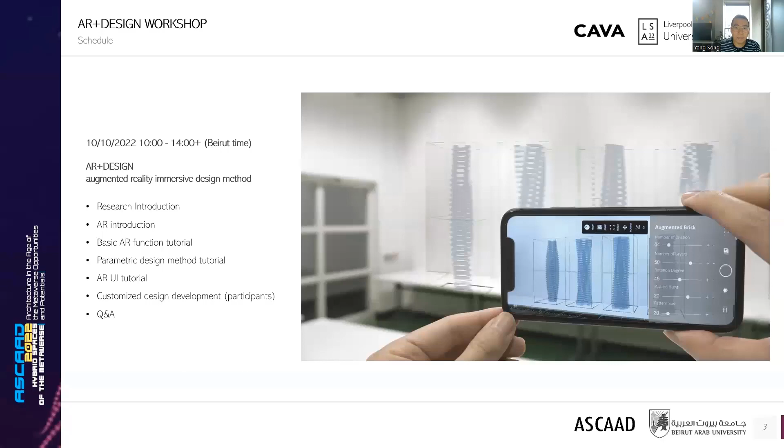After that, the final session was design algorithm development and Q&A. This online workshop aimed to introduce the knowledge of exploring immersive parametric design through an augmented reality environment.

As the quintessential 3D-4D design field, architectural design has been limited throughout its history by 2D to 3D representations. Even though computer-aided architectural design and modeling software is widely used to produce digital 3D models, conventional screen-based visualization methods for design and analysis are still restricted to how well the user understands the space on a computer screen, as the design is done outside of the building site. Hence, there might be disparities between the design and final outcomes.

Ideas like exploring immersive design in AR, as well as real-time modification experiments and interaction with the built environment and the metaverse, will therefore act as the central core of the research streams to reduce issues in the current design method.

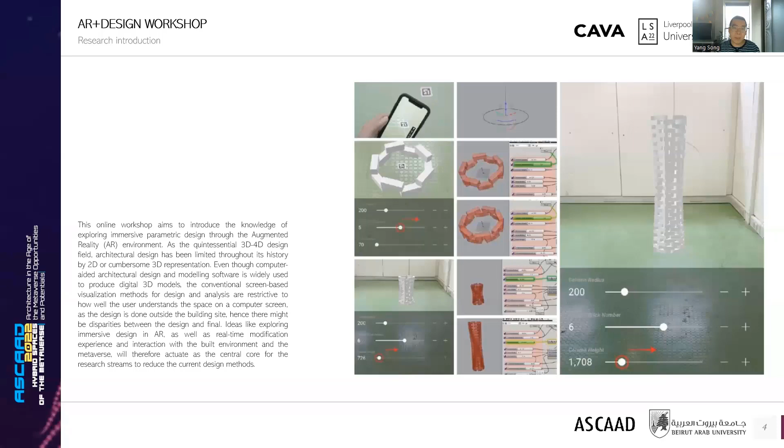So participants learned about the parametric design method of brick-based structures as a demonstration, covering basic AR modeling logic, AR on-site holographic preview, AR real-time interactive functions, and basic AR input methods.

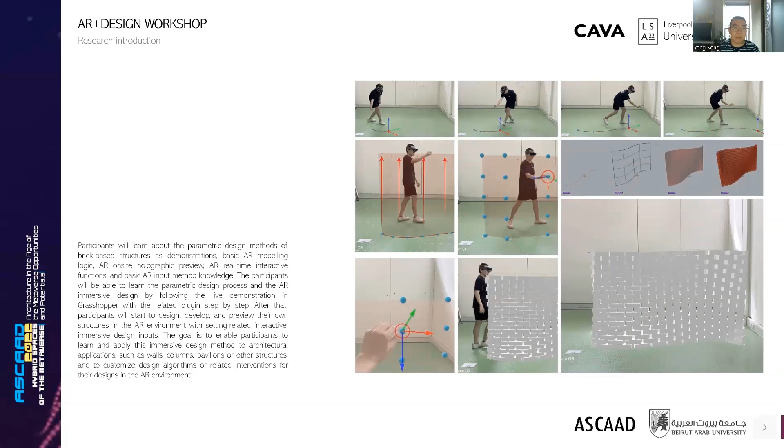Participants were able to learn the parametric design process and AR immersive design by following live demonstrations in Grasshopper, with the related plugin setup step by step. After that, participants started to design, develop, and preview their own structures in an AR environment with related interactive immersive design inputs. The goal is to enable participants to apply this immersive design method to architectural applications such as walls, columns, pavilions, or other structures, and to customize design algorithms or related interventions in the AR environment.

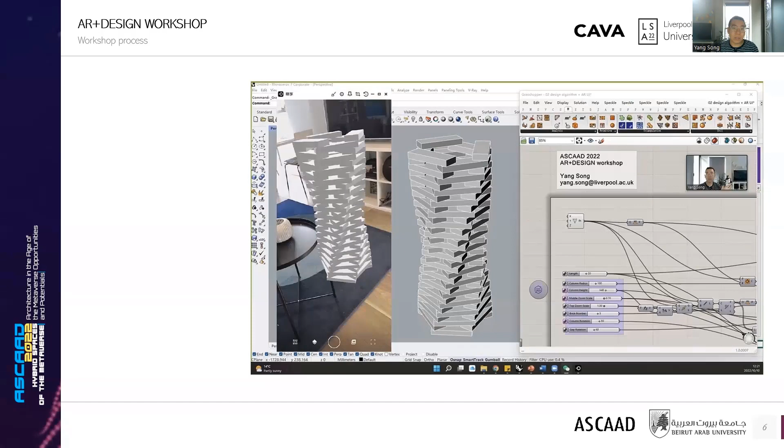There were 44 participants in total, and most of them work in architectural design or interior design. Therefore, the results of the workshop are better because everyone has relevant background knowledge. The workshop outputs were submitted in the form of videos and pictures.

For the video, participants used mobile phones to access the demonstration of the AR immersive design through corresponding skills learned from our workshop, and previewed the design structures in real time, overlaying the physical environment as AR holograms.

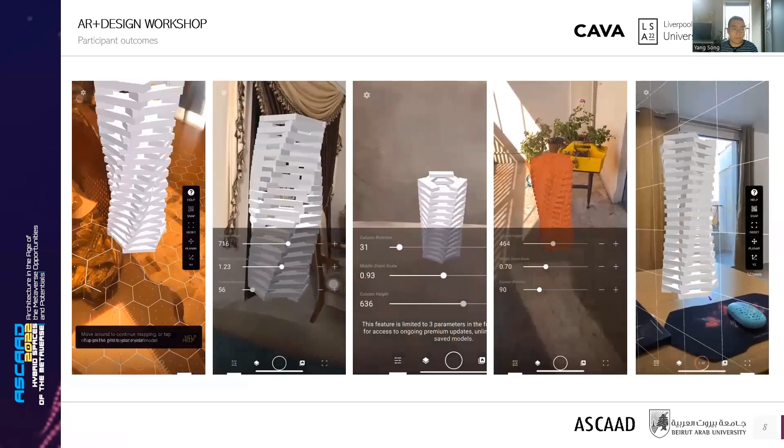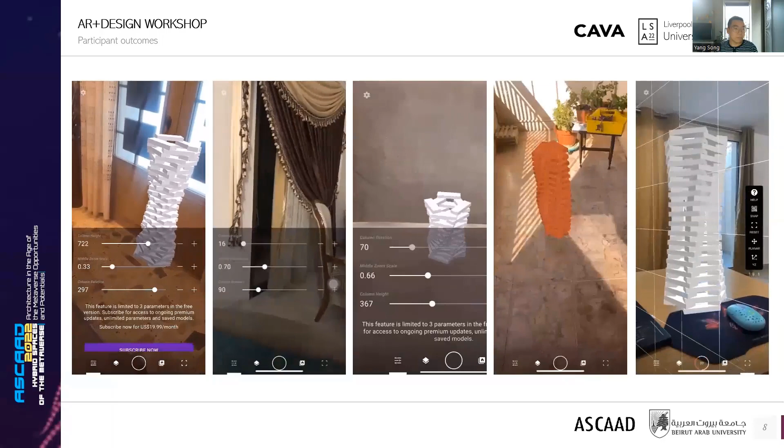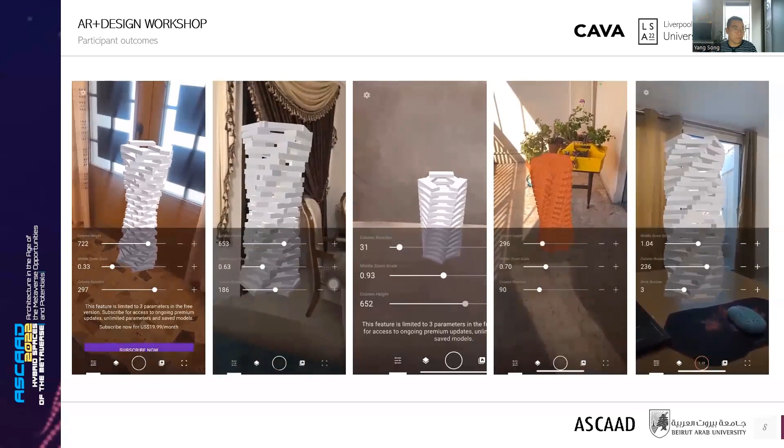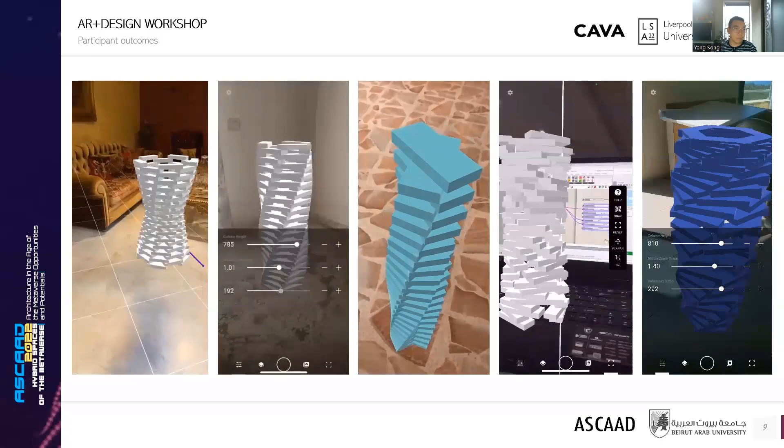Here are some outcomes from our participants. We also have some more fancy structures that were done by our participants.

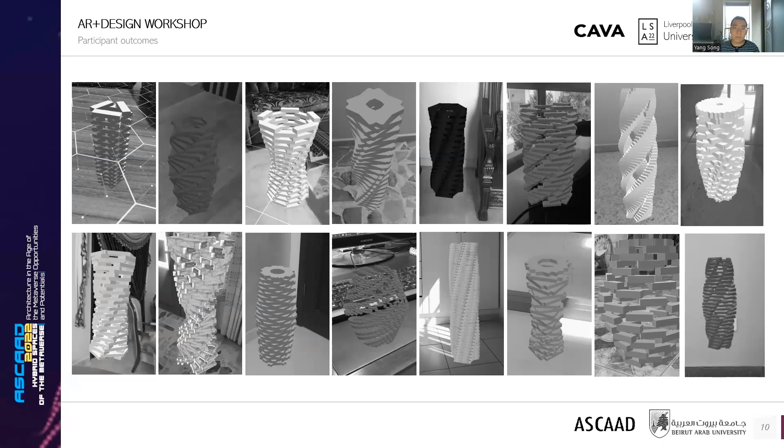Through this workshop, participants learned the basic logic of AR design, as well as the basic interaction functions required for AR immersive design in Grasshopper. These ideas and attempts will help beginners enter the AR immersive design process faster and more effectively for further development. So that's all for my workshop outcome.

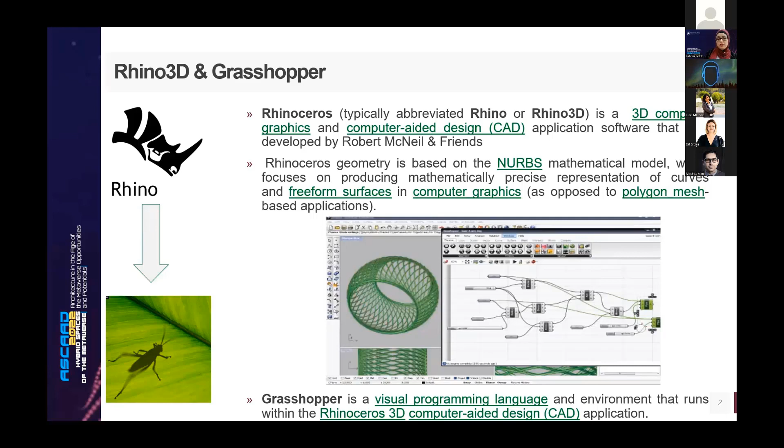The workshop topic was about interactive digital parametric patterns using Rhino and Grasshopper. This was workshop number 2, mainly about Rhino and Grasshopper. Rhino, or Rhinoceros, is a 3D computer graphic, computer-aided design (CAD) application software. Rhinoceros mainly works on a NURBS mathematical model, which focuses on producing mathematically precise representations of curves and freeform surfaces. In Rhinoceros, we have a plugin called Grasshopper, which is a visual programming language and environment that runs within Rhinoceros 3D.

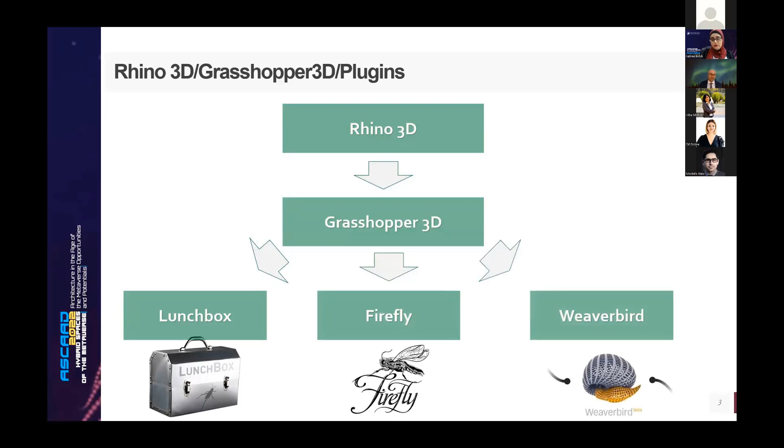In Grasshopper, we have lots of plugins that could be introduced, such as environmental simulation plugins like Ladybug and Honeybee. But in this workshop, the focus was on three main plugins: Lunchbox, Firefly, and Weaverbird. The main one was Firefly.

Here is an introduction to Lunchbox. The Lunchbox plugin works on putting panels with different examples on surfaces, such as diamond panels, hexagon panels, random, skewed quads, triangulation, and other types of panels. It also works on trusses, creating structures, grid structures, hexagonal structures, and other types of structure. Weaverbird works just on meshes, such as Catmull-Clark smoothing and splitting meshes into quads.

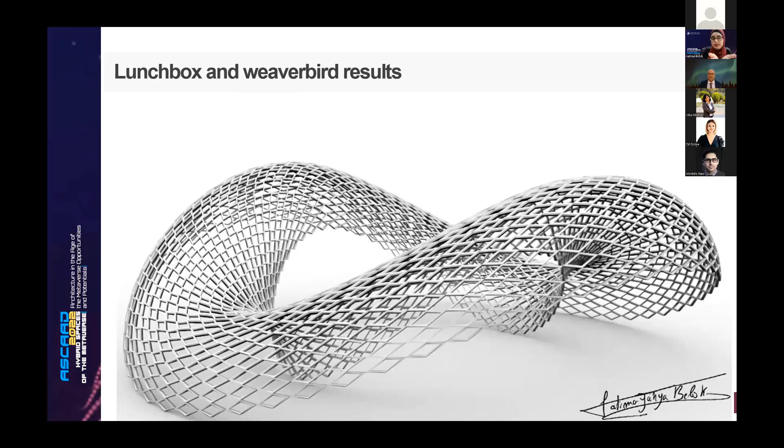The main plugin was Firefly, which is focused on introducing sound. These are some examples of Lunchbox and Weaverbird results, just based on surfaces that give patterns. So these are some examples. The main plugin was Firefly.

Firefly focuses on giving input. This input could be a sound, music, or a voice. Then the process works to give an output. What could be this output? This output could be an interactive parametric pattern. So I introduce a sound that has different frequencies, and this different frequency will give different parametric patterns.

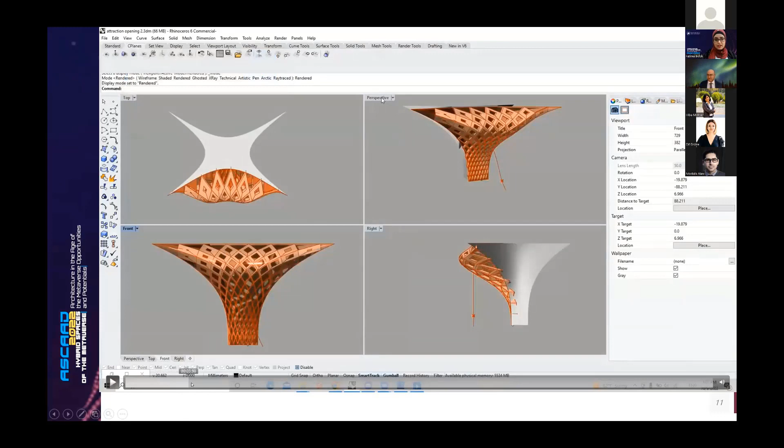For example, here with this interactive facade, we can see the difference between the patterns. Each differentiation in the pattern is based on the sound - if the frequency is high or low, it differentiates the pattern. So based on the music or the sound, we could have different patterns. So this was one example.

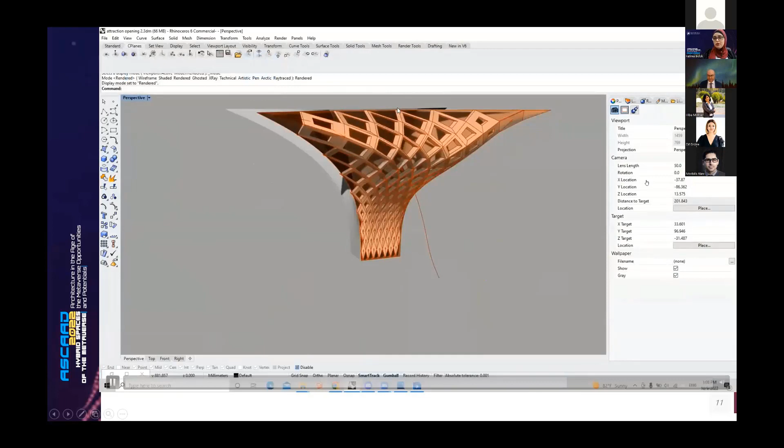The focus of this presentation is mainly on the work of the students. Let's see the examples of the student work. Each student presented an A3 paper with all the designs and work done during the workshop. We started by putting a small sphere.

We introduced, for example, the sound of the student or any music they wanted, and we turned the frequency high and low, so the spheres started to move based on the z-axis, up and down. Then we added more spheres - for example, here we have 5 spheres that move up and down based on the sound itself.

After that, we moved to more complicated examples in Grasshopper. We worked on creating surfaces in Rhino, then transporting these surfaces into Grasshopper using Lunchbox and Weaverbird to create a pattern on the facade. Each surface had 3 different patterns because students baked 3 different levels of thickness based on sound - low sound, higher frequency, and higher still. So the thickness was valued by the frequency of the voice, becoming more or less thick based on the sound.

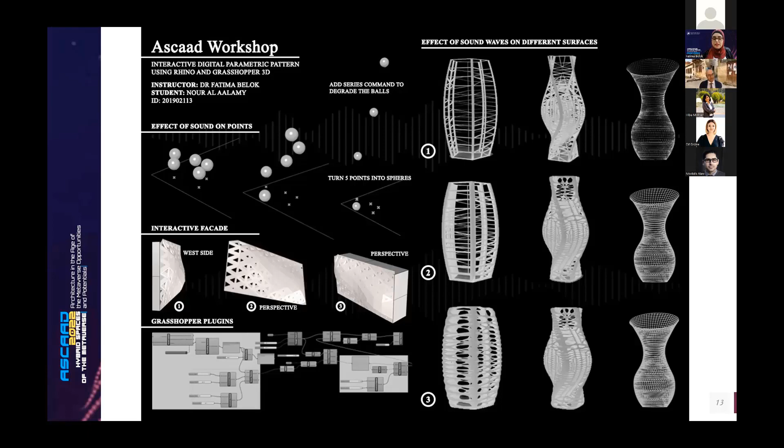We also tried different types of surfaces, for example on different towers based on rotation. We tried different components such as rotation, using series, and different types of components and patterns - here is the Grasshopper plugin. They started with a very simple Grasshopper connection, then it got more complicated to understand the idea further.

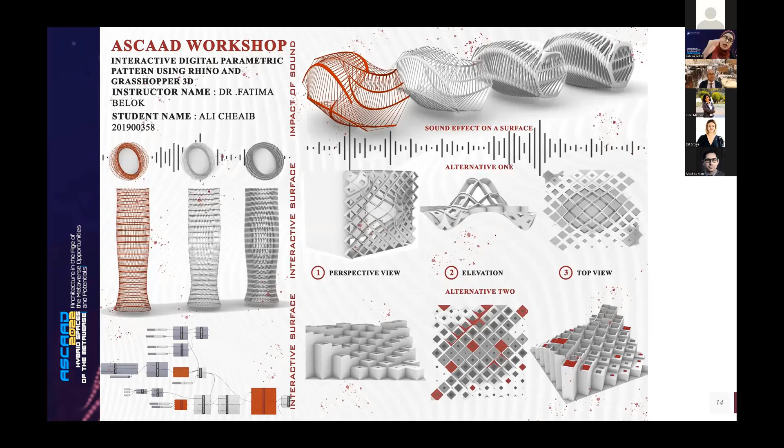Here they also worked on attraction, but based on the z-axis. We can see, if these are buildings for example, these buildings become higher toward the end. We can see a different example here from Neamat, also working on attraction.

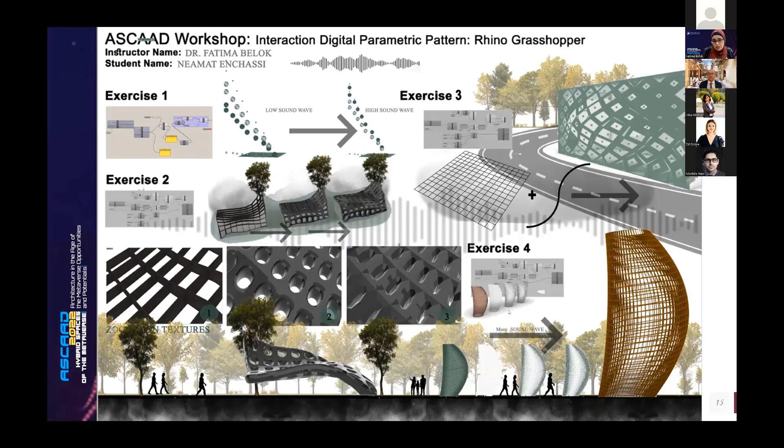She created a shading using Catmull-Clark in Weaverbird that works on meshes. She transformed the surface into a mesh - they had the knowledge of how to transform the surface to a mesh, then apply Catmull-Clark to get a smooth pattern, and how to change its width.

Another student's main focus in Firefly was on something called sound capture. We have the main component called sound capture that captures the sound, then a timer where we specify the time, for example 20 milliseconds or 10 seconds to capture the sound. Then we have remap and construct domain, based on the frequency, whether it's very big or very small.

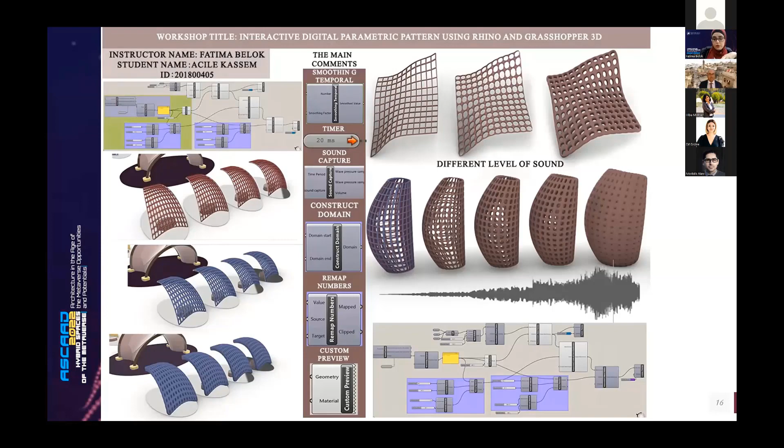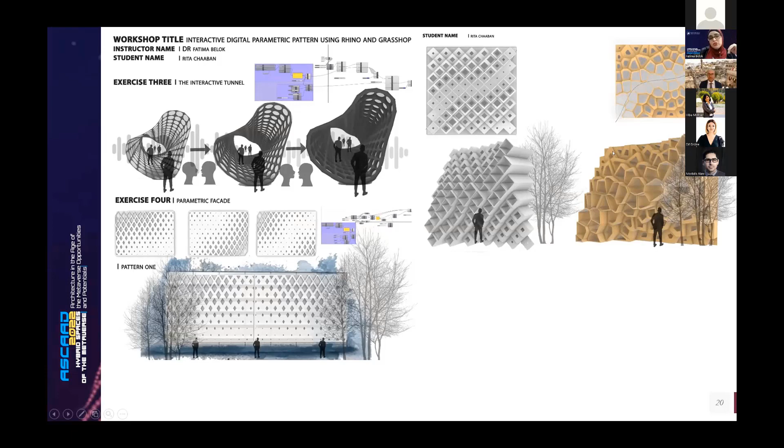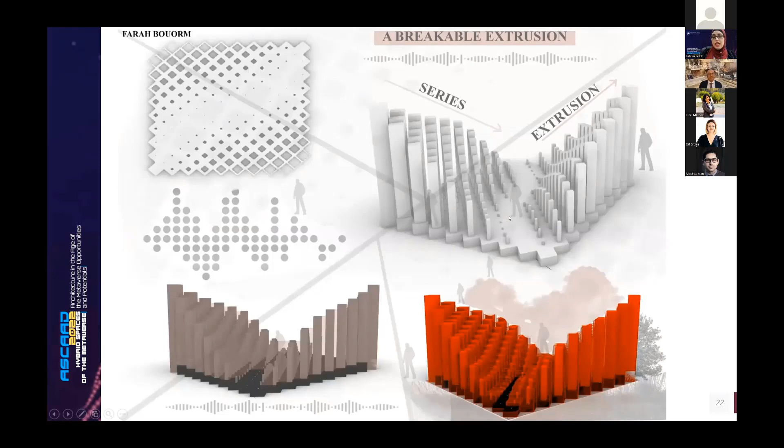Here is another example - he designed a building, and as we can see each student has their own design. We focused on each student putting their identity into their design. For example, this student used the Voronoi pattern and attraction at the same time, introducing sound. Here is another example based on attraction, but using series and extrusion, along with sound interaction.

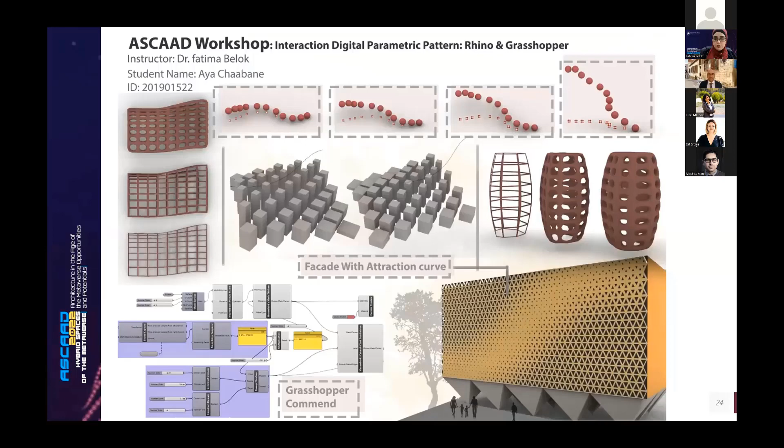Also here, the work was on Lunchbox using triangulation. In all the posters, we can see they used 3 different items: Lunchbox, Weaverbird, and Firefly for the sound. These are different examples.

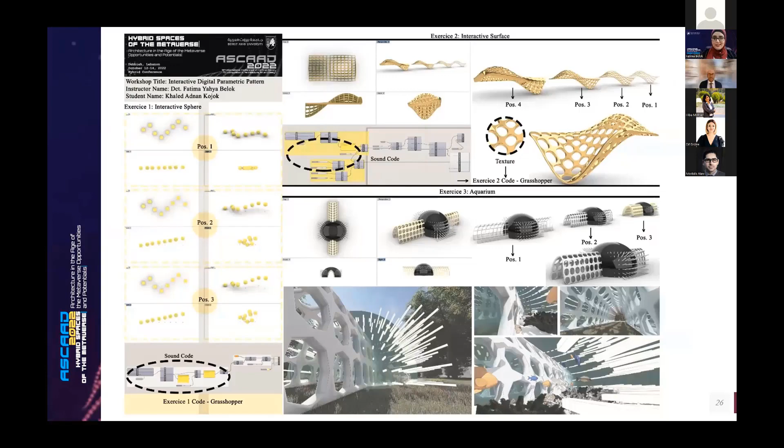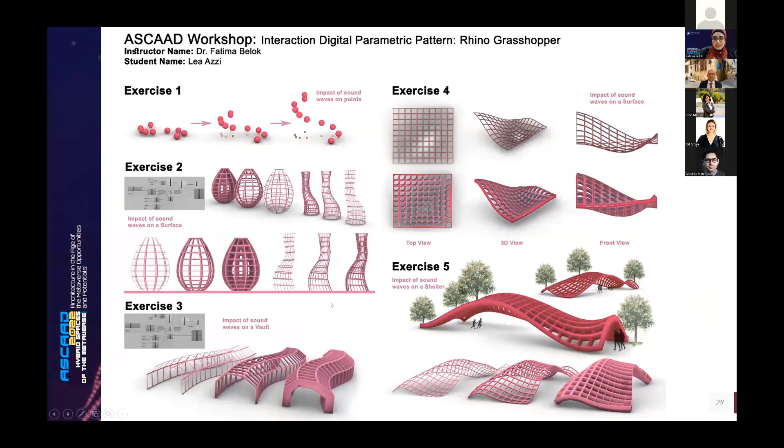Some students started creating their own projects. For example, here a student created an aquarium with concepts and ideas using a dome. This was a design for a surface, and this was a design for a dancing tower and a passage. Now we'll see a small video of the movement of the facade and pattern.

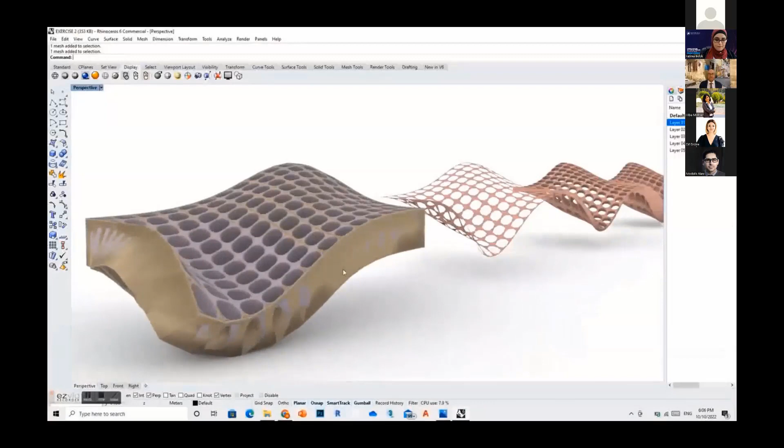I'll show you the video now, it's just 1 minute. This is the attraction based on the sound.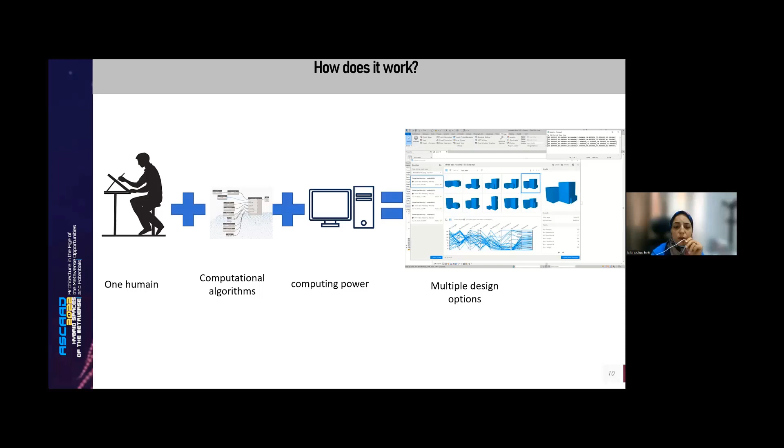Generative design is actually combining human, computational algorithms, and the cloud computing power. Combining these three, we can generate thousands of design options. So you have to understand what you want to achieve, define your problems. This requires you to know how to use Dynamo and create Dynamo scripts. Also, you need to decide ways to measure success and think about how to review the results. So using algorithms, you can decide what problem to solve, what goals must be achieved, and what factors are most important to solve these problems.

So how does it work? Well, we generate multiple studies to find the best outcomes. There are three or four ways we can do this using a generative design tool in Revit. The first one is randomizing, so we can keep running the study in multiple sessions over and over again, and we can filter through the outputs at the end to find the best result. You can also do what's called a cross product, where we generate every single possible outcome so that we can fully analyze the results.

We don't tend to use the cross product because it's pretty slow and it generates a lot of results. But if you really need to get the absolute best, this is the way to do it. We can also use a method called optimize, which generates multiple tests, and we only see the most successful tests out of each batch. This way, you don't see the really bad results, but only the ones that are almost the best, and then you find the best of the best among them.

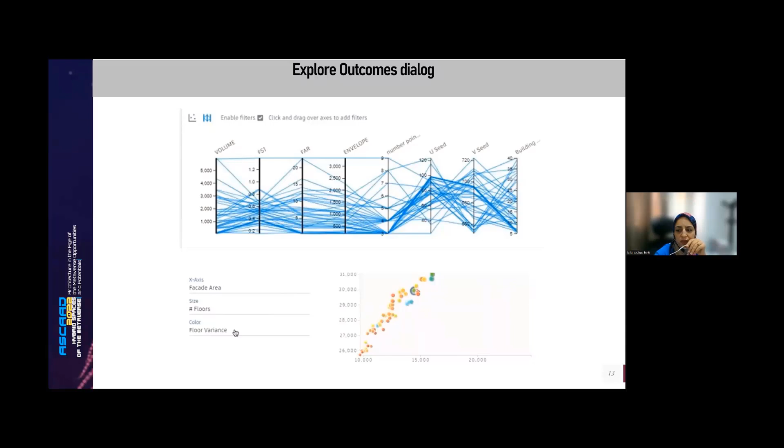You can also explore like this. I prefer using this show/hide parallel coordinate to explore outcomes, dialogue, and constraints display as a follow-up, in the list view of inputs and outcomes, so you can clearly identify which value changes for each outcome and which value stays the same.

For the first day, we focused on Dynamo basics, so as to create a model for a generative design study. We began by developing a common understanding of the mechanics of Dynamo, then moved on to build a set of graphs together that include some basic geometric applications and Revit integration.

For the first application, the objective was to introduce parametric modeling via Dynamo, and the exercise consisted in setting two volumes by declaring variables or inputs, and outputs evaluators, which represent the objective of generative design.

Revit, Dynamo, and generative design were used to study the volumetry of buildings through an iterative process that generates outputs to satisfy certain constraints. The first step is to define inputs and variables depending on the ultimate goals. Then the last step is to select the optimal solution.

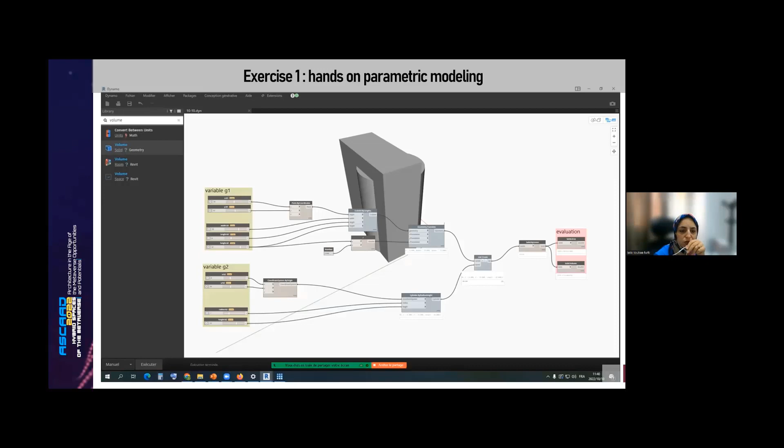On the second day, we focused on adding evaluators and generating design options, and we went over the fundamentals of optimization and how to frame a design problem in terms of goals and constraints in order to drive multi-objective optimization and evaluation in generative design.

We explored the various ways our problem definition can affect the result of the optimization. We exported the optimized solution to Revit for a BIM study.

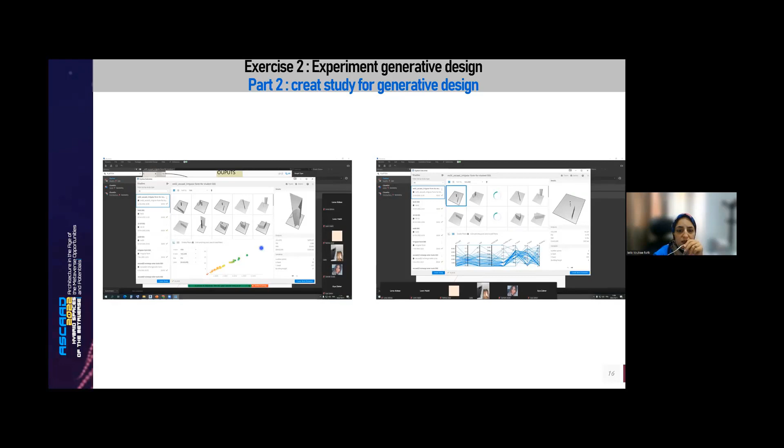The second exercise was a slightly more advanced application. The first part consisted of parametric modeling. We gave participants a program code to complete with Dynamo by adding evaluators. The second part consisted of testing various methods of creating a study with generative design and visualizing results. The third part was to export the result into Revit to generate a solar study and explore a BIM study.

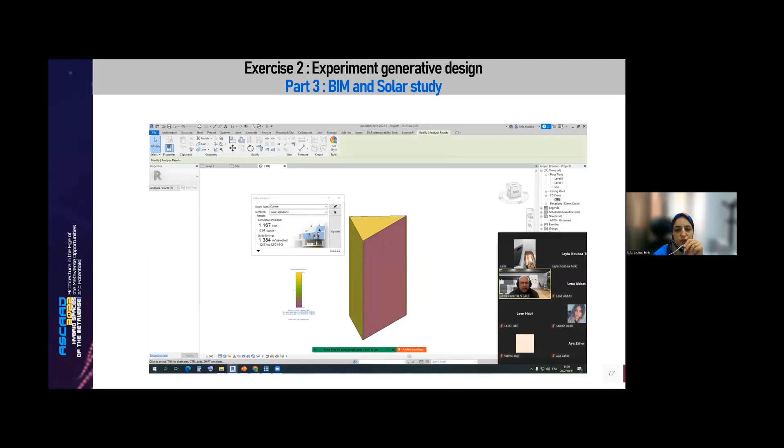Once the optimal solution had been determined, it was possible to import these results back into the Revit environment to complete the BIM modeling study. During this workshop, participants learned how to build geometry generators and evaluators using Dynamo, how to use these generators and evaluators to drive multi-objective optimization toward specific goals in generative design, and how to use generative design tools to evaluate the generated optimal solution and integrate some of these designs back into Revit for a BIM study.

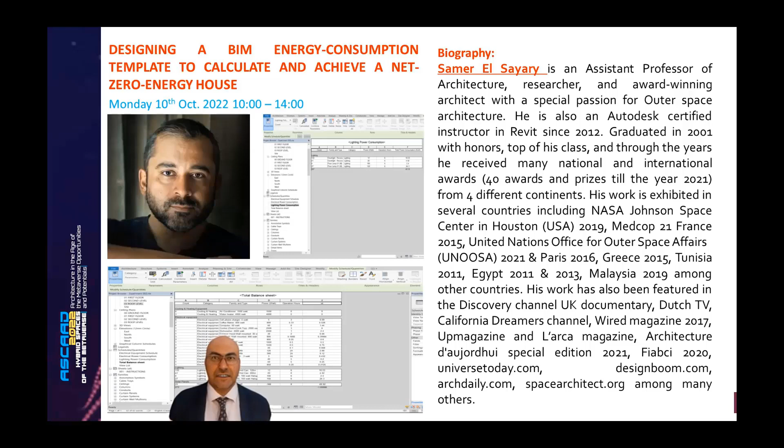Thank you, Dr. Karim, for the introduction. Let me just share my screen. Okay.

So the workshop that we concluded last Monday was on zero energy houses. It is a pressing issue in today's contemporary problems—the issue of energy. We combined zero energy knowledge with how to design a passive house using Revit and BIM technologies.

So I would like to introduce my manifesto first: digging deep into the rules of the universe, including our heritage and our legacy, and applying those rules using cutting-edge technologies—in our case, with BIM, Revit, and some simulation software.

Number 3 is delivering this system of knowledge to future generations, as we have done already in this workshop. These are a set of projects, a line of research that I have pursued since 2011, combined with cutting-edge BIM technologies. So the line of research, the line of practice, and awarded projects are all fused into one fusion pot, which was introduced to the students last Monday.

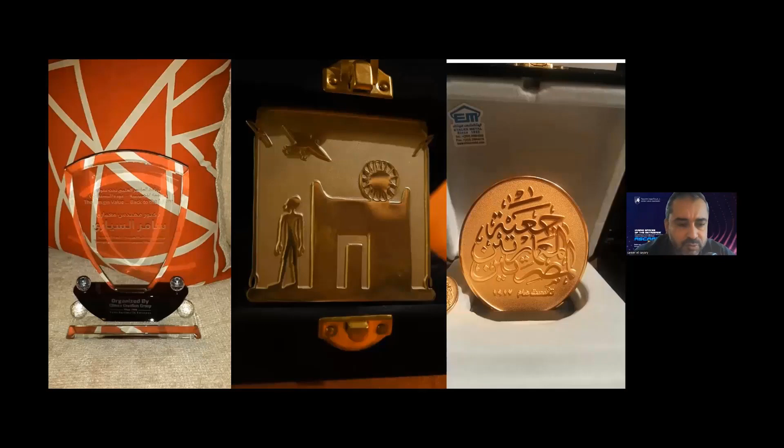This project was introduced to the students and was awarded internationally in several venues. One of them was an introduction to passive houses, and how we can understand the basic fundamental principles of designing a self-sufficient house in terms of energy, food, and water production - a complete sustainable approach.

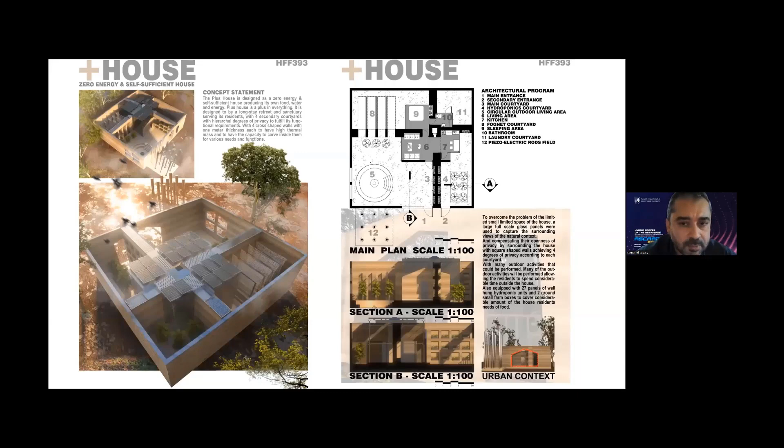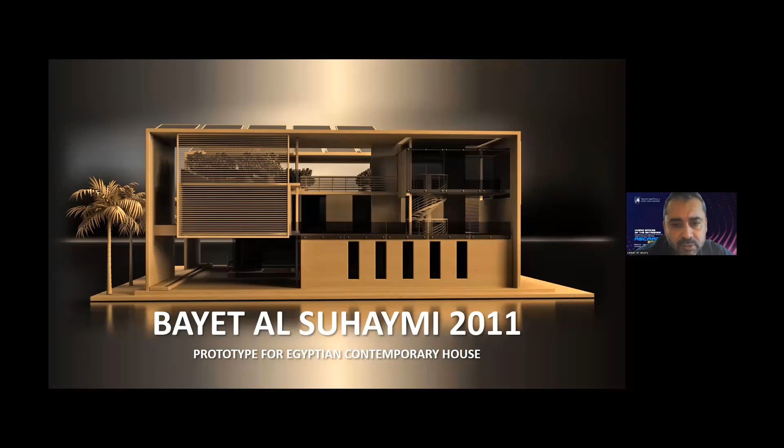The first presentation was for the Plus House, and the second, which was the main one, was Bayet Al Suhaymi, an awarded project. The plans and the Revit file of this particular project were delivered and passed to the students to start experimenting and designing, taking it as a role model so they can take the lead in their own design projects.

Sorry. It's a little bit. Okay.

So the first slide is a simulation of the passive approach of designing a building without the need for any AC or heating system, using and downloading the EPW files, which contain all of the climatic data of Alexandria City from the US Department of Energy website.

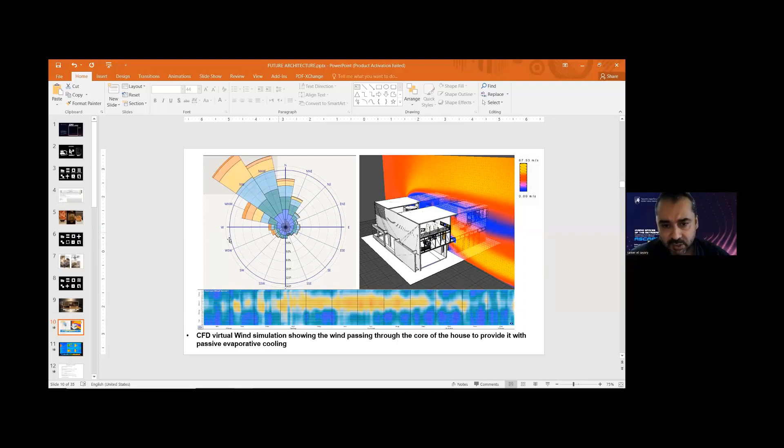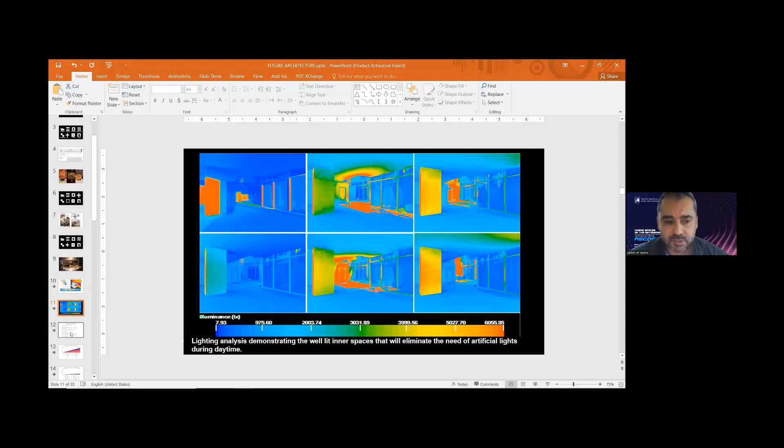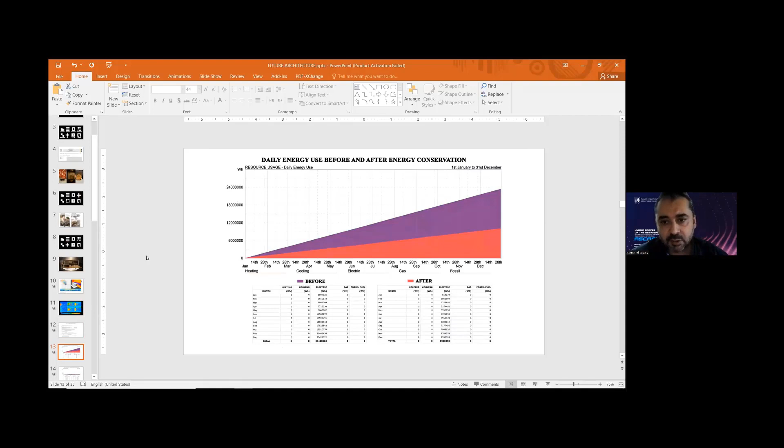After running some simulations, including daylight simulations, we concluded that the design could use daylight for at least 8 hours per day without any need for electrical or lighting equipment. Then a basic calculation method was used to compensate for all energy consumption using solar panels, reaching the level of decreasing the carbon footprint of a building.

Another example was applied in Arizona, which proves that zero energy houses could be applied anywhere depending on the environmental parameters and the specificity of the site.

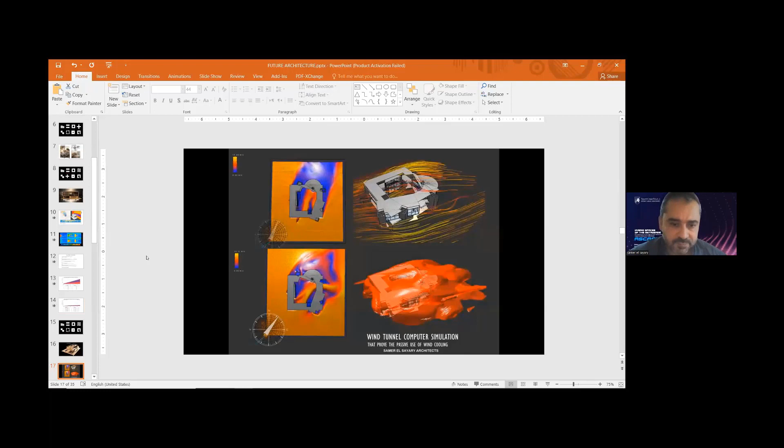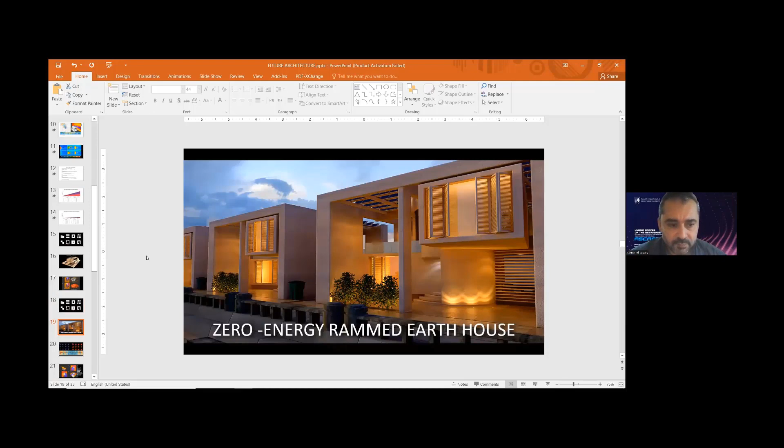Some simulations were also undergone on another house, the Eco House in the Sinai Peninsula, which was sponsored by the Egyptian government in 2014 for the Bedouins of the place. The same methodology was applied to reach a zero energy house.

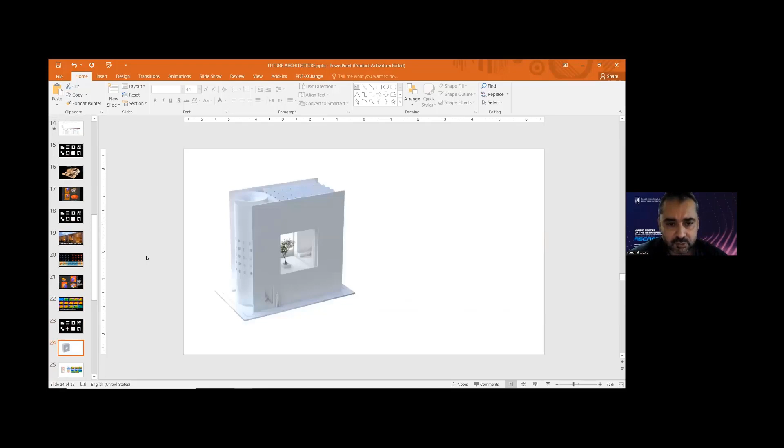After a series of projects to demonstrate and pave the way for a good understanding, and maybe lay the fundamental principles of having a zero energy house and a passive design.

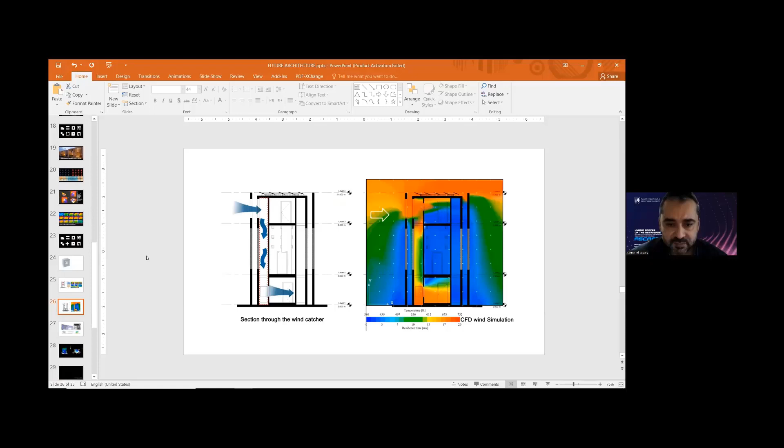Last was the project itself and its application. As mentioned earlier, the template was passed on to the students alongside the projects and samples that have been demonstrated in today's presentation, and the basic calculations were concluded.

There are two kinds of schedules: the electrical power consumption and the lighting power consumption, and they were separated just for the ease of calculations and including the total balance sheet.

The parameter here is having not 0, but minus 0 point something - not 0, not 1, not minus 1. So if the result was minus 0 point something, that was a successful zero energy house. That was the only parameter to achieve.

The compensation was done with several types and varieties of solar panel models downloaded from the market and applied into the template. Not only did students learn how to use the template, but how to modify it, how to include new devices, or modify existing devices.

We are very sure that today's accelerating pace of technology carries every day a new invention, a new electrical device, maybe a modification, maybe a star-rated kind of device. So they should have the capability of modifying and editing the template to push the story of the human story forward.